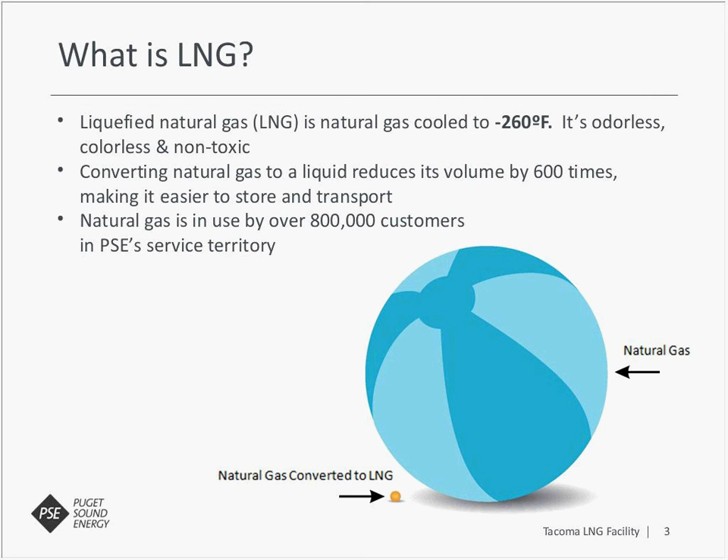So I want to talk a little bit about another project that's been in the area, which is the methanol plant. There's a lot of confusion, I think, around these, frankly understandably so. Unless you're working in this industry, you're probably not watching all of this that carefully. So you're hearing about these two different projects in the news, or maybe social media, or your friends. And since they both start with the same basic product of methane, it's easy to get them confused, but they are very different. So I'll kind of walk through those differences.

On the left is a description of the methanol plant, which has now been terminated. On the right is a description of the PSE Tacoma LNG facility. Looking at those two columns, you get a sense of the difference in size. We're looking at a plant that would produce several million gallons of product a day in the methanol plant versus a quarter to 500,000 gallons in the Tacoma LNG facility.

You can also get some sense of the size when you look at the dollar figures. The methanol plant was a project that was estimated to cost up to $5 billion, whereas the Tacoma LNG facility that PSE is building is a fraction of that, at about $300 million.

And then, this became a big issue, I think understandably for a lot of folks in Tacoma, water use. The water use of the methanol plant was more than 10 million gallons a day. The water use for PSE's facility, about 2,000. Now, if you read the EIS, you may have noted it actually mentioned up to 13,000 gallons. We have to put that in the EIS because that's the most the plant could use. But on average, it's about 2,000 gallons compared to 10 million for the water use for the methanol plant that's now been canceled. You can see the same thing around electricity use, about 30 times more electricity being used by that methanol plant.

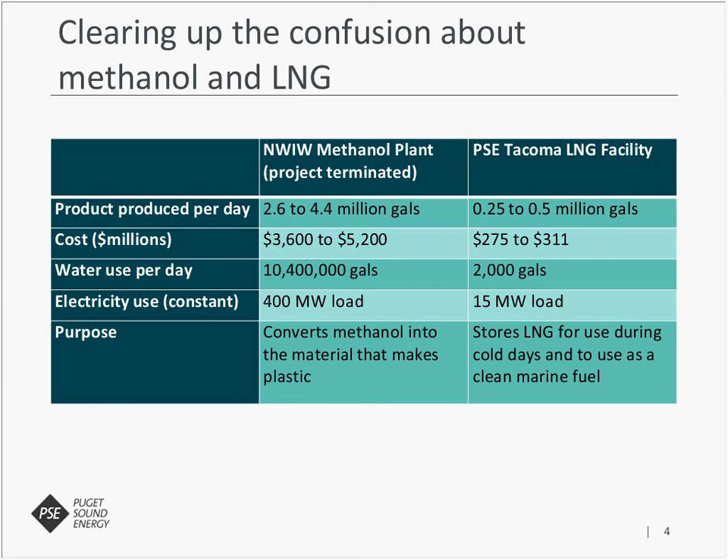So on to our next part, which is about where the plant is. The plant is located in the port of Tacoma area. I'm going to turn it over to our project manager, Jim Hogan, to talk a little bit more about the site and some of the other aspects of safety.

Thanks, Andy. The LNG facility is located on the Blair-Hylebos Peninsula in the Port of Tacoma, on a 33-acre site that was a former Navy base. As Andy mentioned, in its liquid state LNG is not flammable. If LNG were released, it turns back into vapor, much like boiling water converting from a liquid state to steam. When it turns back into vapor, there is a certain period of time where that gas has the potential to be ignited, so we must plan accordingly. Although those types of events are very rare, the regulations for designing and siting an LNG plant require us to study and model all events that have a certain probability of happening.

That's the information included in the siting report that there have been discussions about. The regulations require that we look at all those events and have a third-party engineering firm model them, and that any release we have needs to stay within our control. That model validates that any spill events that occur would stay within the property lines of our facility. We also look at various fire scenarios that could happen, and the regulations require that at the property line, the heat coming off the facility stays within an amount that's not harmful or dangerous beyond our own property line. So events staying inside our property line is all driven by the federal codes that govern siting and design of the facility.

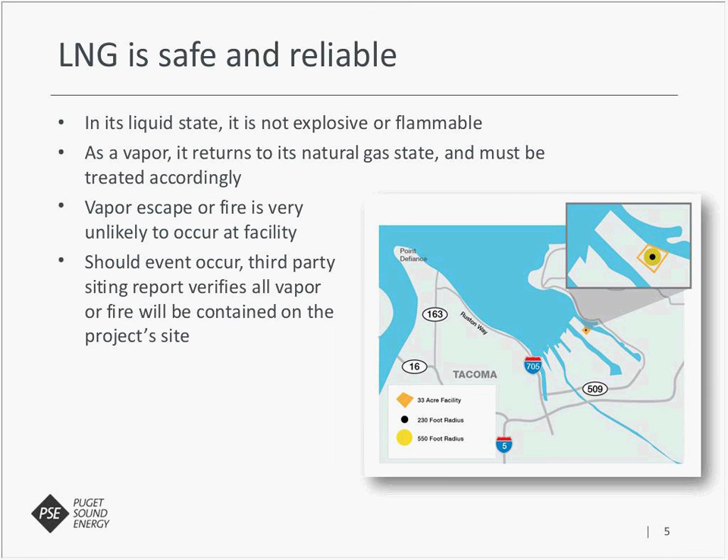Very good. As we move through the presentation, talking a bit about the facility, we'll show you on the next slide a picture of what we're looking at on the Port of Tacoma. Jim, describe what people are seeing here. The picture on the left is looking down from the northeast Tacoma area at the site. The predominant feature at the site now is a 250,000 square foot warehouse. This site for the last many years has been used as a logistics center with trailers and trains coming into the site and moving cargo from trains to trailers or vice versa.

We'll be demolishing all of the buildings on the site except for two. The buildings are old, they have some contamination issues, and basically we'll be cleaning the site back up, putting in an entire new stormwater system, and then building our new facility. On the right, you'll see that the tank becomes the prominent feature of the site, but most of the actual 33-acre site is relatively vacant. The process equipment to make the actual LNG is relatively small, and in general the site will be just a gravel lot.

I'll take one of the questions that has come in. It was on why couldn't we just pipe in more gas on the cold days. I think that really gets to the issue that there is one large pipe that serves western Washington, and this helps in case you had a failure of that pipe. This also, because of the location of the facility, allows us to then inject more gas, which would be gas as you find in your home, near the user. So a couple of questions there around why would you be here versus just using a pipeline from someplace else. This is partly a backup in case you don't have that pipeline.

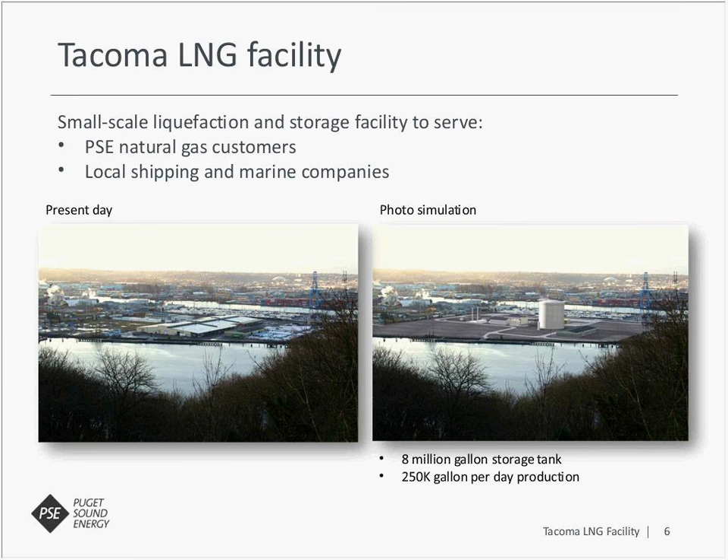And Jim, I know we mentioned the siting and the design. So this is kind of the conceptual picture that we're seeing right now on the right of the tank, but we also have a more detailed drawing here as well. Yes, thanks Andy. So the siting report contains a number of different diagrams and pictures, and in that report you'll see both models of the different vapor clouds. This drawing that we have on here now shows actual thermal radiation.

Wait a minute, Jim, excuse me, thermal radiation - what would the rest of us call that? Heat, thank you. So in this case we've taken our worst-case fire scenarios at the site, and the circles around each of these areas represent a spill and a fire from these areas. As you can see, our worst-case scenario has a radius of 550 feet that, in order to meet code, the public needs to stay out of that area, and that circle fits within our 33-acre site. There's a whole lot more pictures in the siting report of all different types of scenarios - we just picked this one as an example.

Thanks, that's good to see that. And again, for people who are interested in seeing the siting report - CB&I is Chicago Bridge and Iron, and of course we have an expert from CB&I here tonight. He'll talk more about it in detail, and they will also be at the open house coming up on Monday. That's a page from the report, and folks can see that report now online through the City of Tacoma, also the Tacoma News Tribune, but also Monday night at the open house. The project kicked off a couple years ago.

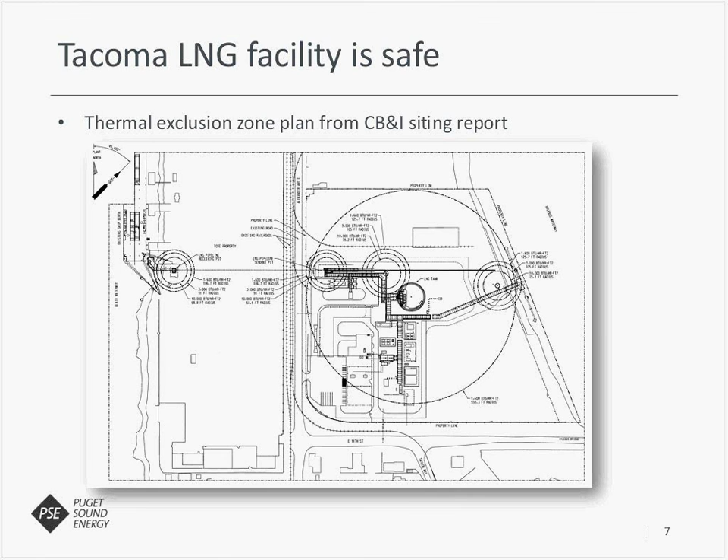Certainly. To build this LNG facility, we've had involvement with 16 different local, state, and federal agencies. As Andy mentioned, there's a significant number of different permitting and approval processes we've gone through. We started our initial discussions with some of the federal agencies back in 2012, and as the project developed, getting into 2013 and 2014, we started the more formal process of gaining permits.

One of the things people are probably most familiar with is the environmental impact statement that we filed. That document is about 700 or 800 pages, and it goes through all of the different impacts of the facility. That was done mostly in 2014 and 2015. Because we're building in the marine area, constructing a structure on the shoreline, there's significant involvement from Washington Department of Fish and Wildlife, the U.S. Army Corps of Engineers, et cetera, and a lot of looking at how that construction impacts the environment. Otherwise, it's really an alphabet soup of different agencies and permits.

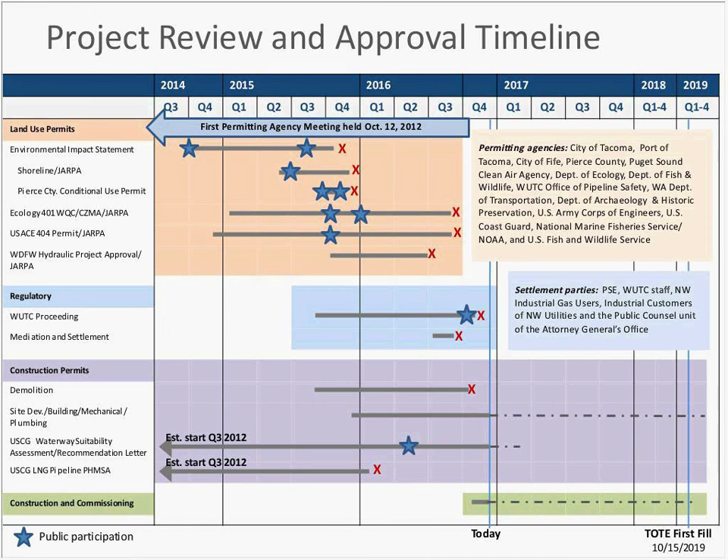Recently, there was an international treaty signed that created an emission control area, which is a 200-mile area around North America. Inside that emission control area, or ECA as it's called, it requires ships to operate with lower sulfur emissions. Traditional marine fuel does have a fair amount of emissions, so ship operators began looking at what their options were to build or operate cleaner.

If people are familiar with methane as a fuel, like compressed natural gas, in King and Pierce County we have an awful lot of buses that run on compressed natural gas. Most of the garbage trucks run on compressed natural gas, and this is really no different. It's a very clean fuel, and so the shipping industry is now looking for a way to run on methane.

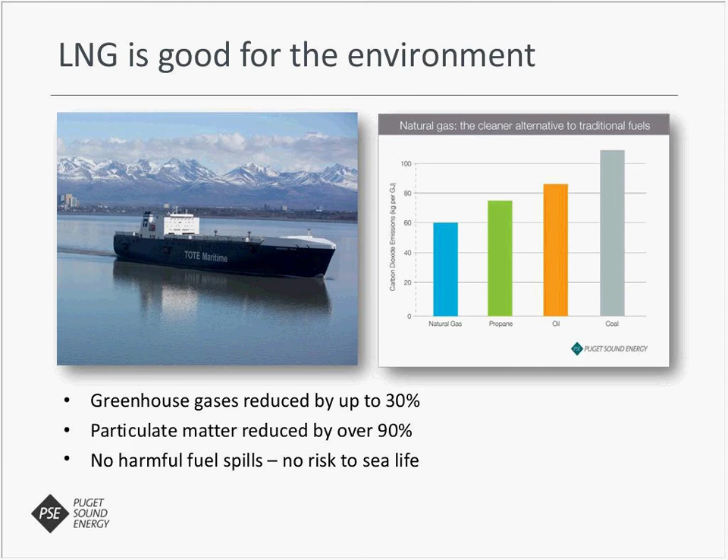All right, well, we've looked at the environmental impacts here. I'd like to turn the page now and talk a bit about the economy. One thing about this — we're going to talk about the new jobs that come in during construction or operation, but I don't want to overlook the existing jobs and how having the ability of ships at the Port of Tacoma to convert to this clean fuel matters, as we're talking about tighter emissions rules.

The Longshoremen's Local 23 says 1,500 jobs are employed out of the Port of Tacoma today. So that's the idea of maintaining hundreds of good-paying, family-wage jobs now. By having a clean fuel at the Port of Tacoma, the port can continue to be competitive. As we've seen over the years, there's a lot of competition with ports in B.C. or California or elsewhere. So being able to switch to this clean fuel, as much of the world is doing, is really important for keeping those jobs. Again, the local Longshoremen's and Warehousemen's Union accounts for about 1,500 jobs today at the port.

And then, Jim, if you could talk a bit about the construction and the ongoing jobs from the site. Certainly — during construction we will peak at around 250 construction workers. These are union jobs that are fairly well paid, and of course those folks spend money and feed their families and things like that.

And then also, there's quite a bit of construction materials purchased locally, which also helps drive the economy. Ongoing, we're anticipating there'll be 18 employees at the site, and those will be skilled jobs that are family wage jobs or better. Those are new jobs that don't exist right now. And as people spend their money, it multiplies, and it ultimately should support over 100 new jobs in the region. Lastly, this project is an improvement to the port and to the existing use of the site, and it generates millions of dollars in tax revenue through property tax, sales tax, et cetera, both during construction and long-term when the project is in operation.

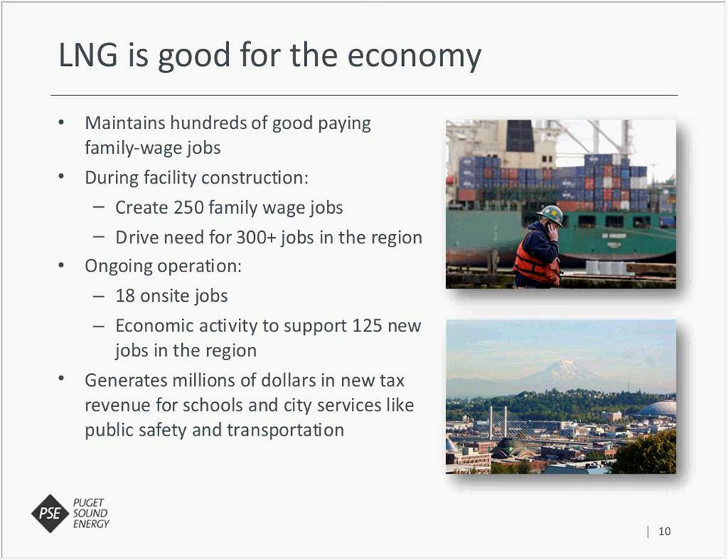Our next subject here tonight, looking at the economy, is a bit about TOTE and TOTE's leadership in the industry on LNG. I want to turn it over to Seth Storsett. Seth is with TOTE and part of their team in Tacoma. Maybe, Seth, you could talk a little bit about TOTE, what you're doing and your leadership around LNG, and also a bit about your operations in Tacoma, kind of what happens there and what you do in Tacoma.

Absolutely. So for those of you who don't know much about Tote Maritime, we have two vessels that call between the Port of Tacoma and the Port of Anchorage, two weekly sailings, Wednesday and Friday nights. We've been doing this for 41 years, just out of the Port of Tacoma. We supply one third of the goods that go there, including milk, apples, clothing, vehicles, construction materials — you name it, we can take it there. We are basically a lifeline to Alaska. So I just want to talk about a few of the environmental things that we've done in the past and that we're continuing to work to do.

We're really a leader in the industry. We have rain gardens at our terminal that take about 80% of the heavy metals that would go into Commencement Bay and pulls those out. We also connect our ship to shore power, which allows us to shut our generators down while we're in port and not put off any emissions. Currently, we're the only ones in the Puget Sound that do that, so it's something we're proud of.

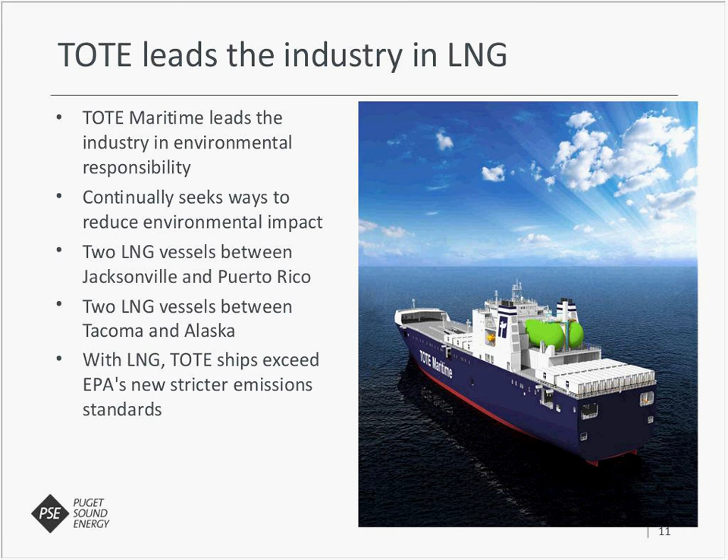For those who don't know CB&I, we were founded back in 1889 in Chicago, and for the last 127 years we've built up to a company that's now 40,000 people around the world. In the LNG industry, we started about 1958 with the first containment tanks, and we've built entire facilities since then. We are a leader in that industry — we've done these all over the world.